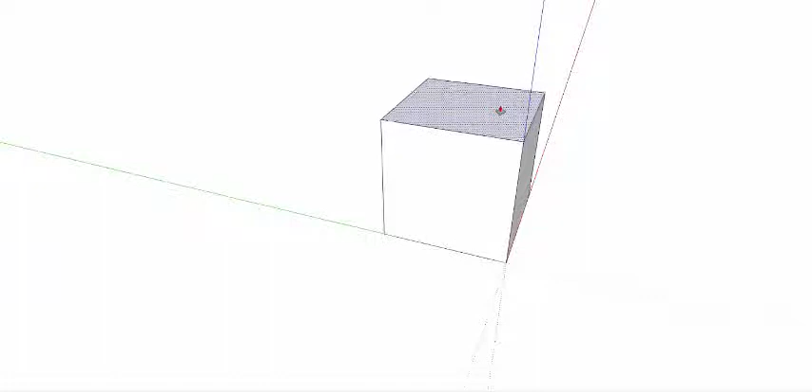Okay, we'll leave that one alone. So what I'll do is take this guy here and make a nice copy of this. Okay, and I'll get rid of this one, I don't leave this here. Then I can make a copy of this and move it over.

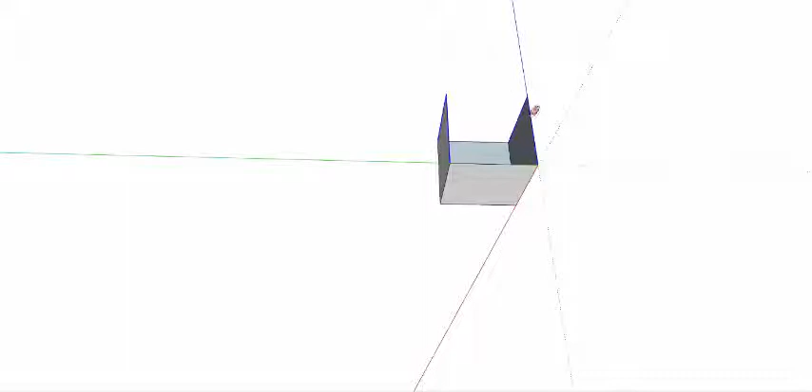Get it far enough out of the way. Okay, and then I'll come back here. And for now, I don't need this, so I could just erase the box. I'll just keep the floor mat. Okay, there we go, I just connect it back up. That's 1,000. Good. And so now I'm just looking straight down this way.

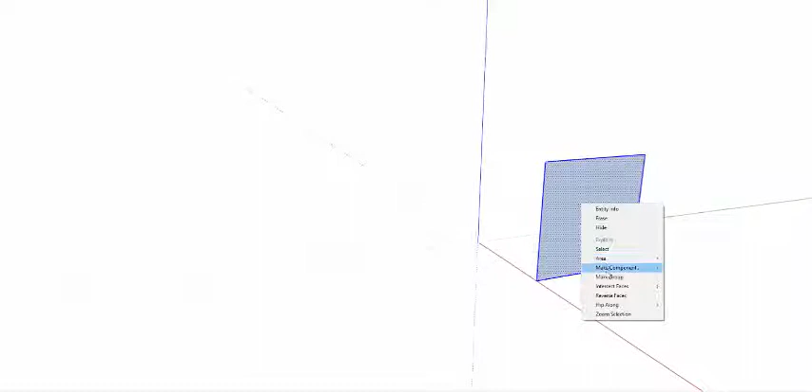So I'm going to put this and center it. I'll make a group out of it, right? And then I'll move it. I can use this to center it as best I can, eyeball it like that, and I'll move it right here.

Okay, now we'll use the golden ratio. So if that's 1, we need to make it go out to 1.618. And the way to do that is we start out with... I don't think I need to, let's explode it.

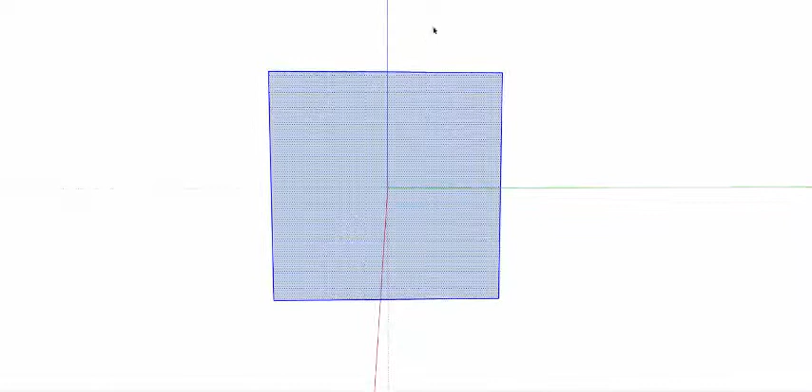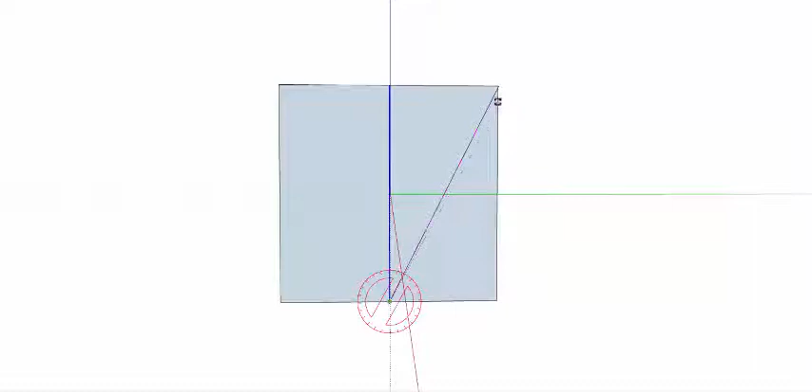Okay, now I'm going to go one line here. Okay, and then one line here, and then rotate it. And now we'll rotate this down the main diagonal, make a copy of it, and rotate it all the way over to here. And that doesn't look good. Let me see, that doesn't look like it's hitting right on the corner, does it?

Okay, so then we go right here. Okay, now I can cycle this over that part there. So I just go like that and make a copy of it. Okay, and there we go.

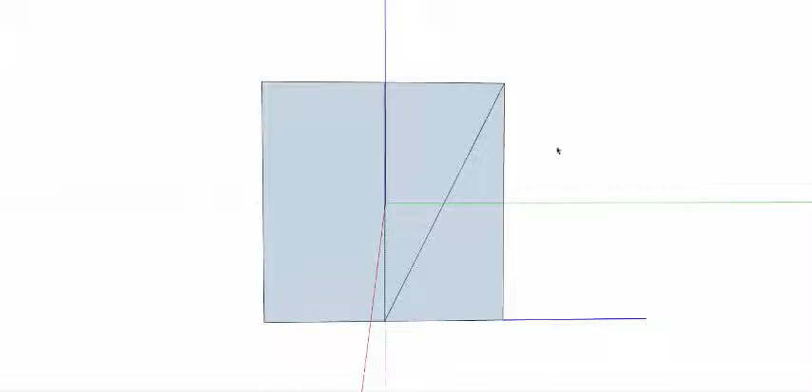Okay, now I take this piece over here, which is this is 1, and that's 0.618, which is the golden triangle. Then I'll just take this guy, yep, and then I'll rotate it 90 degrees.

Like this. There we go, and I don't see it at all. So I'll try it again. And there we go, okay.

Now all we have to do is connect this line across to make us a rectangle where we have 1 and 1.618. So now I'll clean this up.

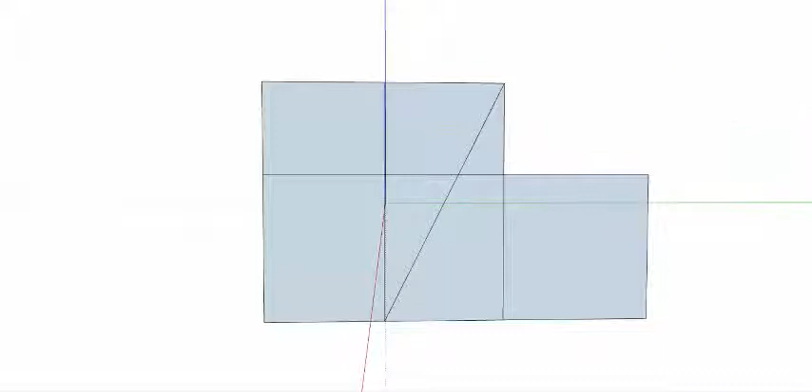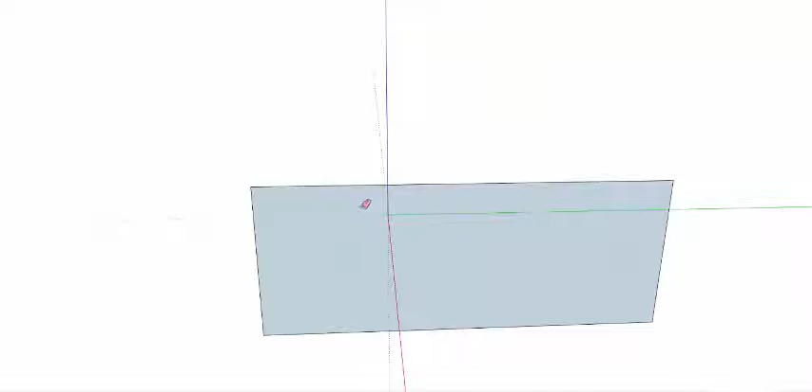I don't need this stuff. Okay. Alright, that's good. I don't really need that either. Okay, so there's a nice golden ratio rectangle.

It should be 1 by 1.618. Okay, we can check it just to make sure, but this is the way of doing it without having to use any of that. That's 0.618, right? And that one is 1.618. Okay, that's the key. So I'll make a group out of this.

Okay, and then what I'll do is move it, center it. So I'm going to center right about there. Yeah, and there we go.

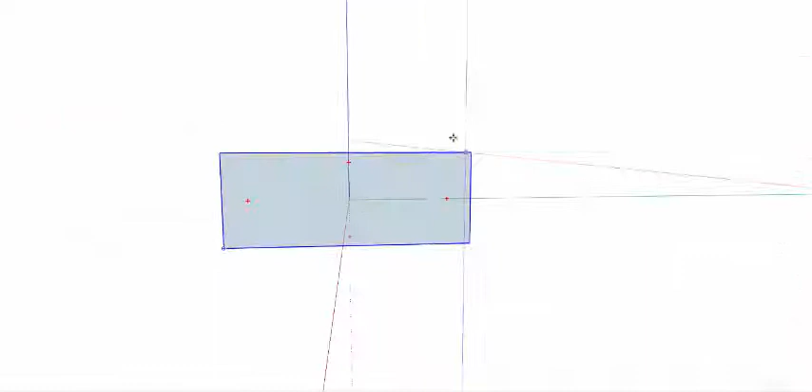Now I'll twirl it. So this is 1. Okay, and I'll go like that, and I'll go like this. Okay, and then I'll twirl that. It's 90 degrees again. There we go.

Alright, and then I'll twirl this one time, right here. So I'll go right in the middle. Okay, and I'll make a copy and they're like this. Okay, and then I'll go up here and twirl it.

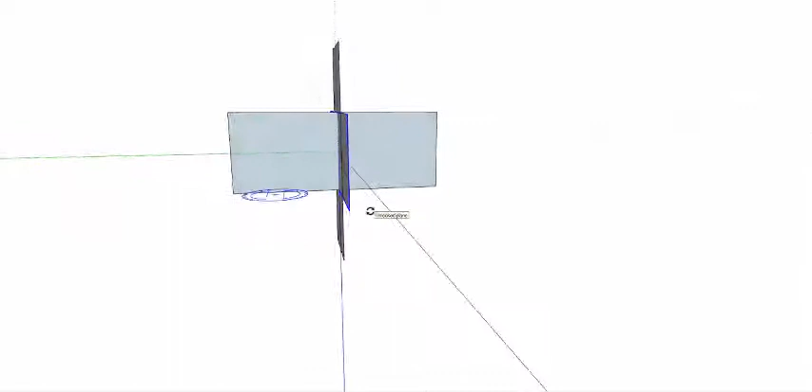That's easy enough, huh? I just need to twirl it right. Yeah, so here we go. There we go, and there we go.

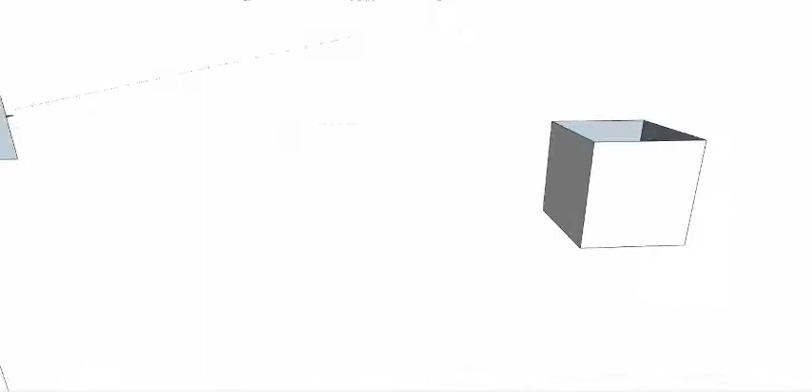Okay, so now all I need to do is bring in my cube. And what I'm going to do with this cube is mark the center point, which is right here, right? And then I'll go to the center point, here to here, okay? And I can do the same thing here.

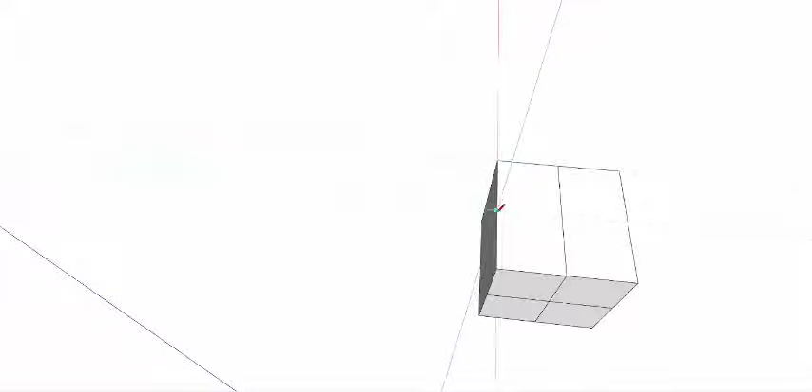Okay, and then there we go, that's nice. And then I'll move one here, here. Okay, and I'll do one inside. It's probably a little bit of overkill, but that's okay. And I'll come over here and I'll get rid of this wall.

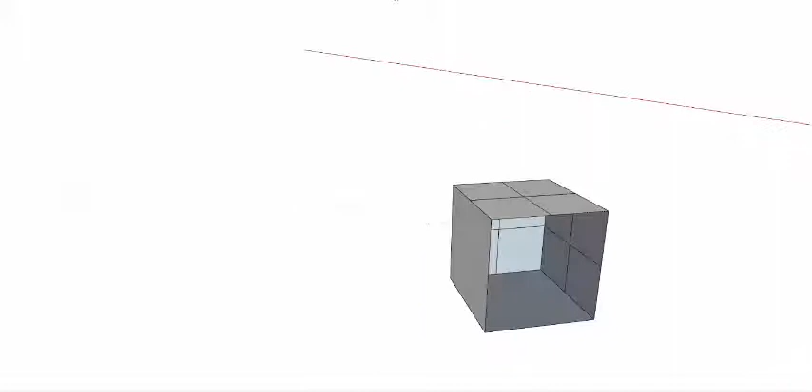Erase, okay. And I'll make a group of this. Now, before I do that, I'm going to have to connect my center point. So that would be, okay. So the center point would be from here down. So I'll go to the center point here, right?

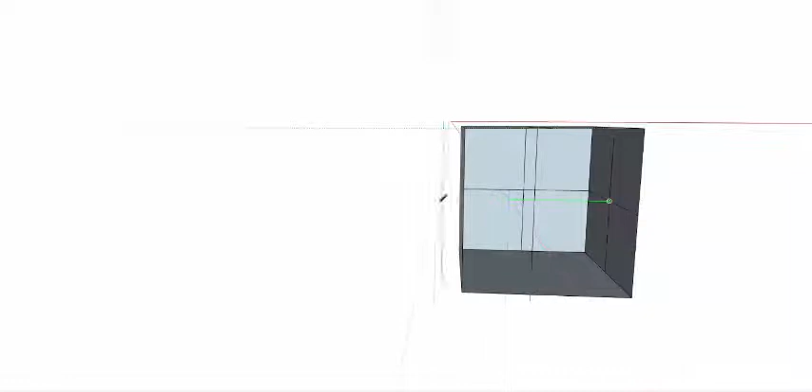And then I would just follow this guy down to the blue axis. Then I go over here and I get this guy. And I come up through here. And there we go. Okay. Now all I gotta do is center it on the other thing.

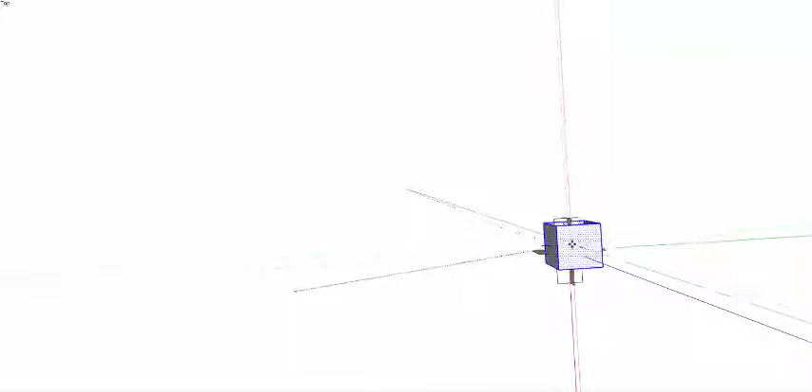So now I'm gonna hide. I'm gonna take this mid, I'll put this as a group. And then I'll put this guy here, right? And start moving along. Over here. Over here. Alright, and we'll get into here.

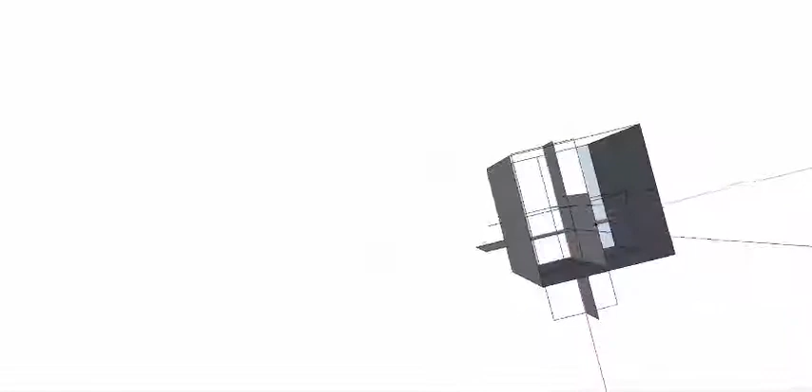And okay, so let's see, what side was open? It's sealed up. Erase, okay. Oh well, that's top one's open. So I have to grab this guy right here. You see where it's at, where they all meet? Right here.

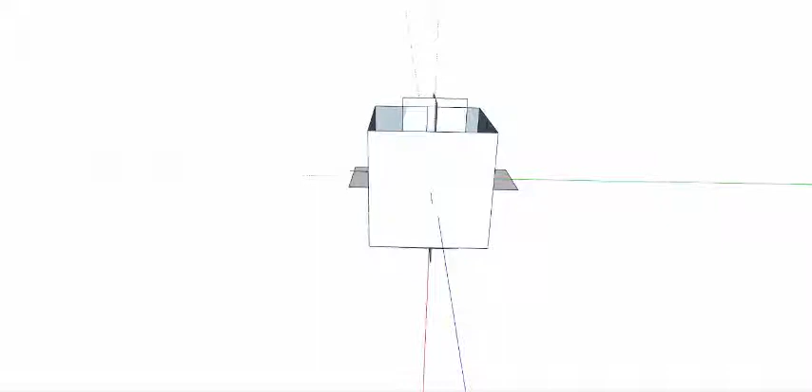And then I'm going to take that and put it down in the center, right? I'll show you. Let me move it a little bit. Oh. Let me go back because I didn't make a group out of it, I guess. I thought I made a group out of it. No. That is weird.

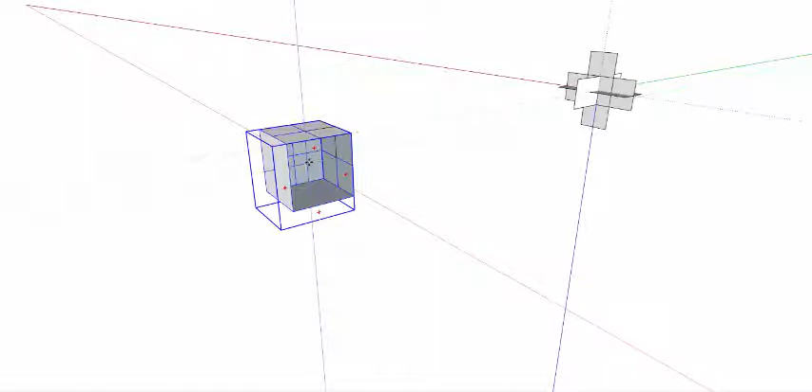Okay, so now I'll make a group. And then I'll grab it here at the intersection. Like right here, right? And then I'll just move it across over here till I can get into right into this point, right? There. See how it's centered? There. Now we're ready to do a pentagon, I think.

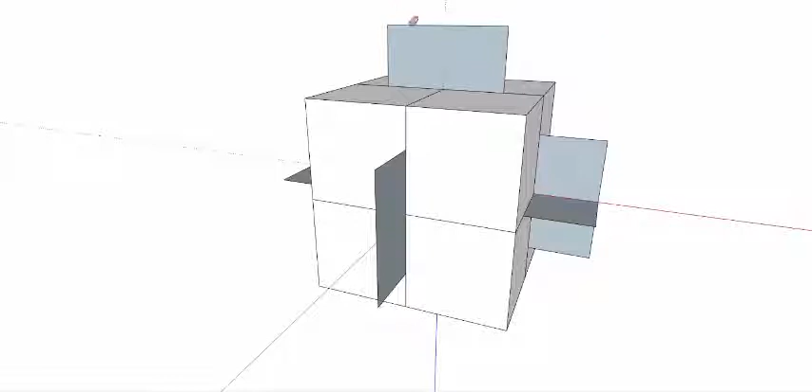And here we go. So now we're going to see if we can make a shape. So I'm going to go from here to here, to here, to here, to here. There we have it. That looks pretty good.

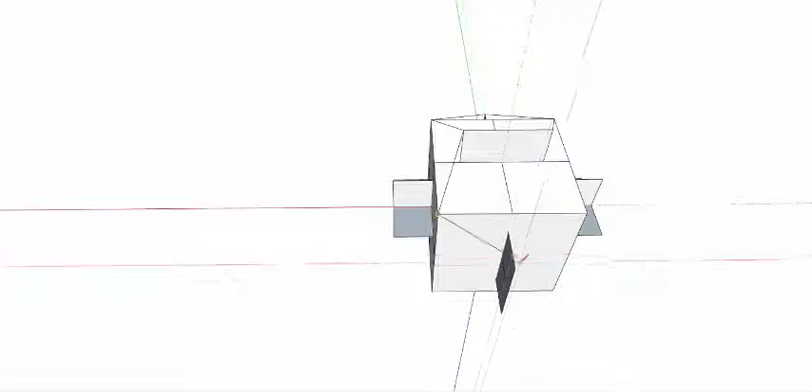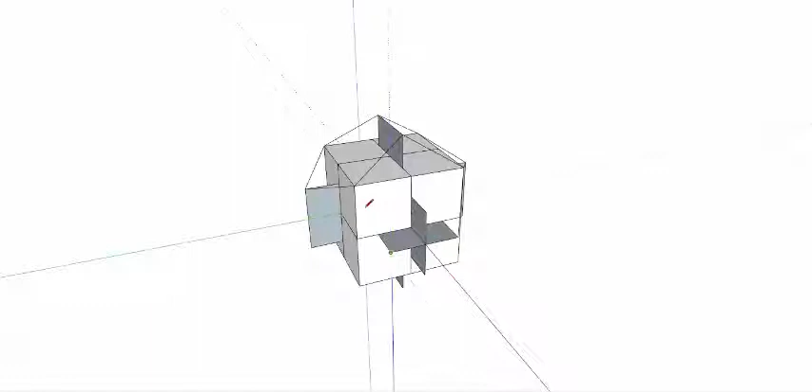So we'll go down to here, right? We'll go up here, we'll go up like this. And we'll do an across of that. Yeah, let's go across. Yeah. Oh, didn't work from here to here for some reason.

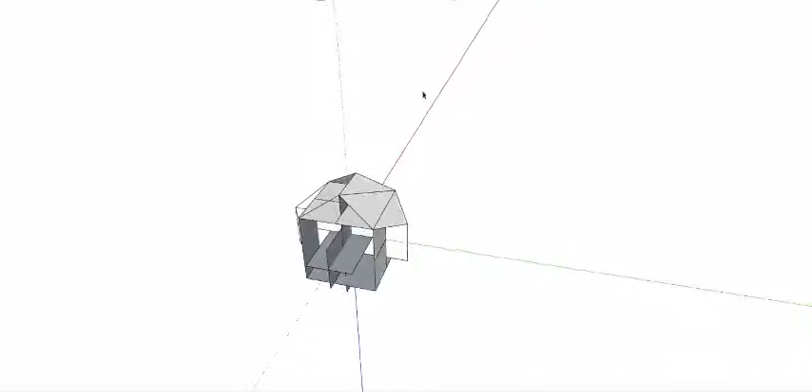Huh. Oh, maybe I needed that point. Yeah, that's why. I don't think I need this diagonal here, do I? Let's get rid of it. Good. Looks like a little house, huh?

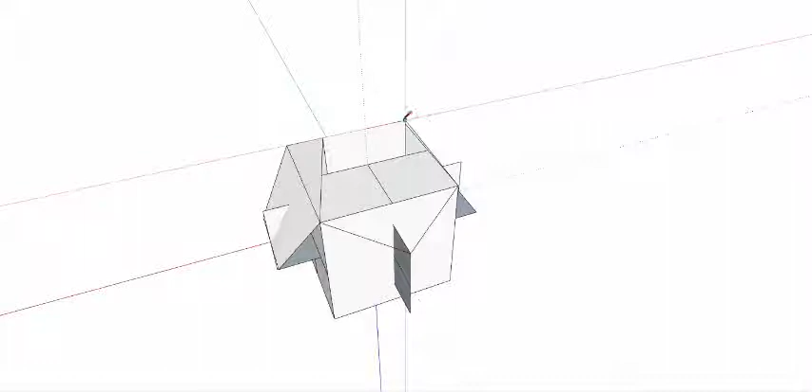Wonder if you could do a dodecahedron house. That'd be pretty cool, I think it could be strong. Let's see. So let me go from here to here, from here to here, here to here. All right. And I can probably get rid of this guy here. All right, now we're going to get our dodecahedron here.

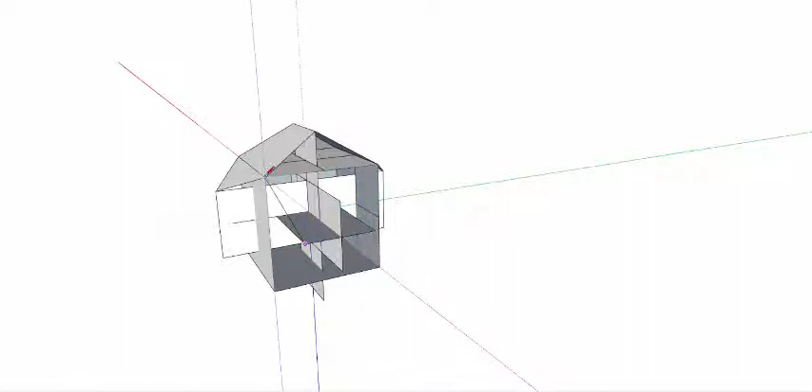All you got to do is go from here to here, from here to here, from here to here, from here to here, and from here to here. There we go. Now we can try this guy from here to here. Good. And go from here to here. Good. And we'll get rid of these two here.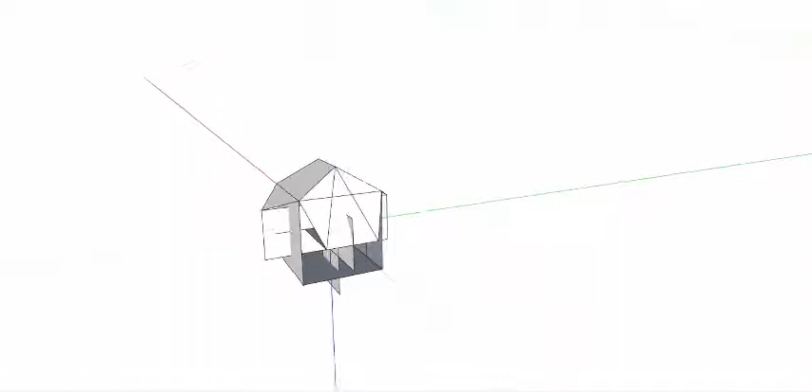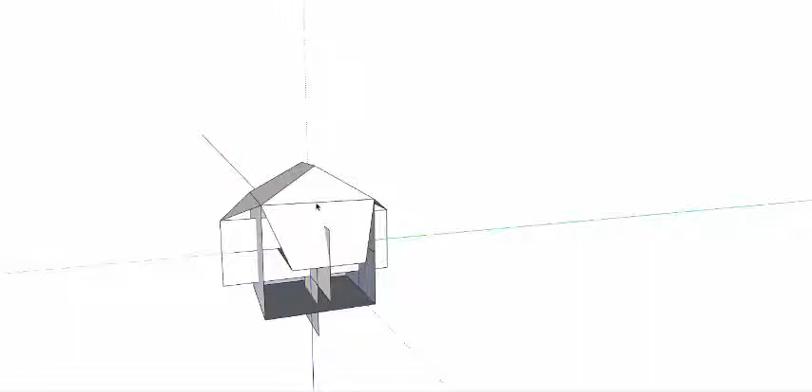No problem. Then what I'll do is just hide it. You can hide your mistakes. Oops, I don't want that. Okay, so I'll hide these. Hide, okay. Go here. Okay, now there we go.

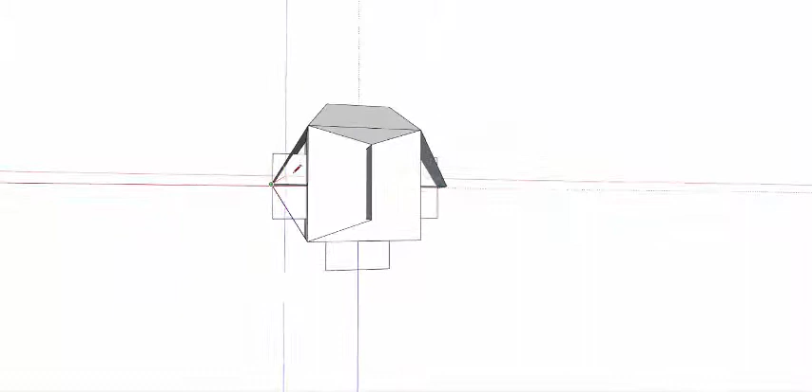Now what I'm going to do is just complete this dodecahedron, but we already have our pentagons. So that's pretty much it. And I'll go from here to here, and then from here to here, and then from here to here, and then we'll go from here to here. Close it up. Okay, and I'll just hide these two so it doesn't look so ugly.

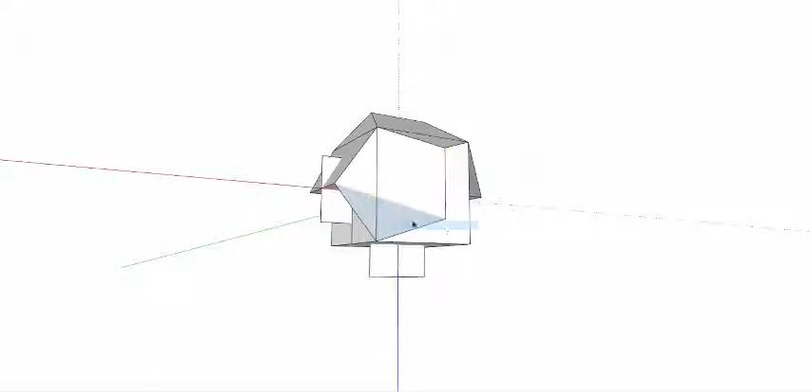Let's see, I can flip that, I think. Reverse face. There we go. Okay, and now you get the idea, right? And so I'll just quickly finish it up because we're almost done anyway.

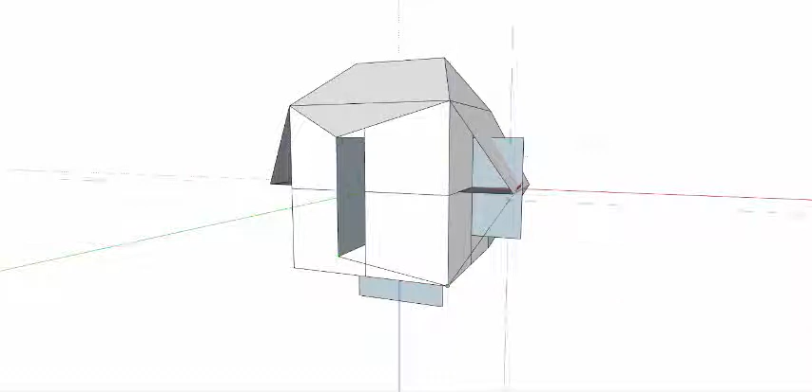So there we go, from here to here. And from here to here. See? And then from here all the way to here. That didn't help, did it? That did. And that did. Okay, and there we have this.

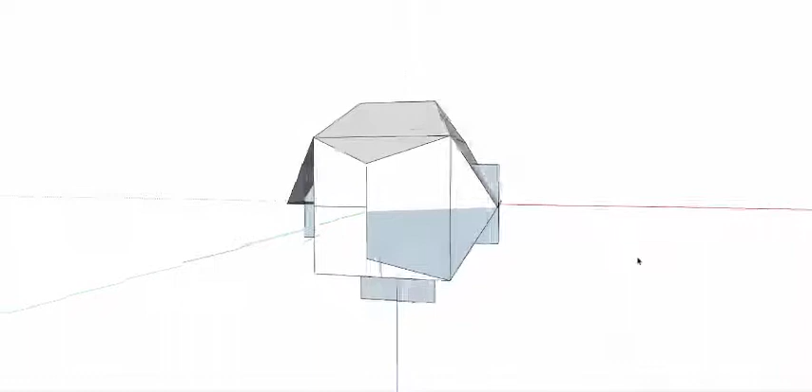Okay. And we're about done, there are 12 of them. So we go from here to here, from here to here, here to here, from here to here, from here to here. There we go. And then we go from here to here. Yep, and from here to here.

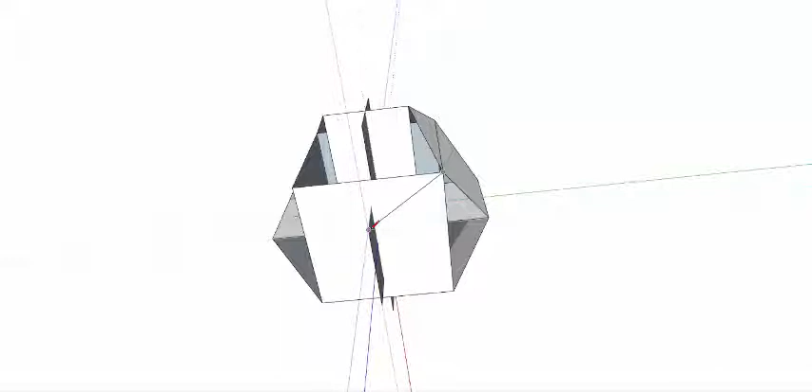Okay, then we go from here to here. We go here to here. And from here to here. Yep, and we'll go over to here. Okay, that's why, I did the wrong spot. It happens a lot.

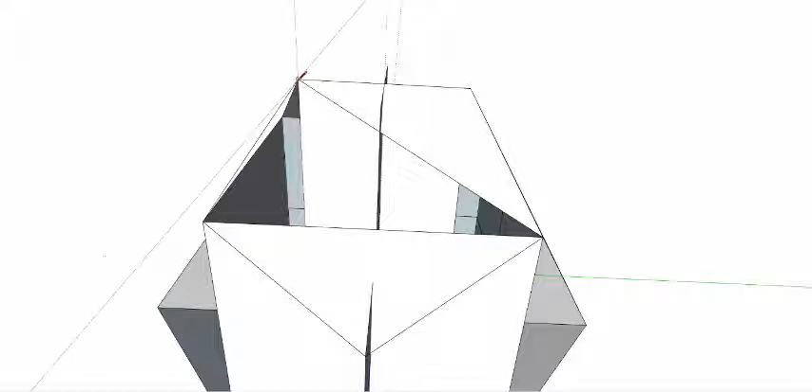Okay. Alright. And we'll erase, or hide. And that's almost done. Here's another one here.

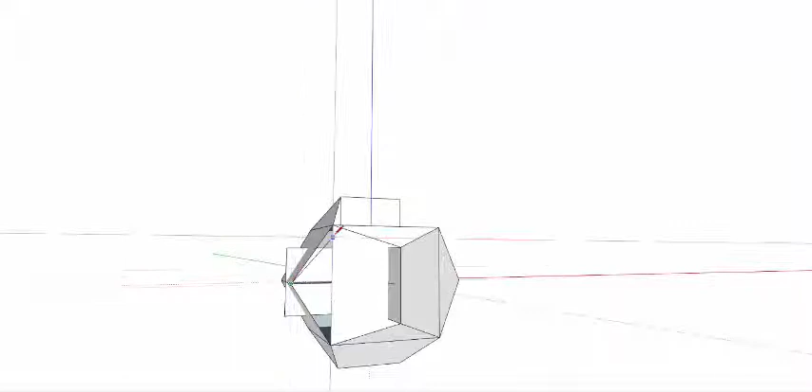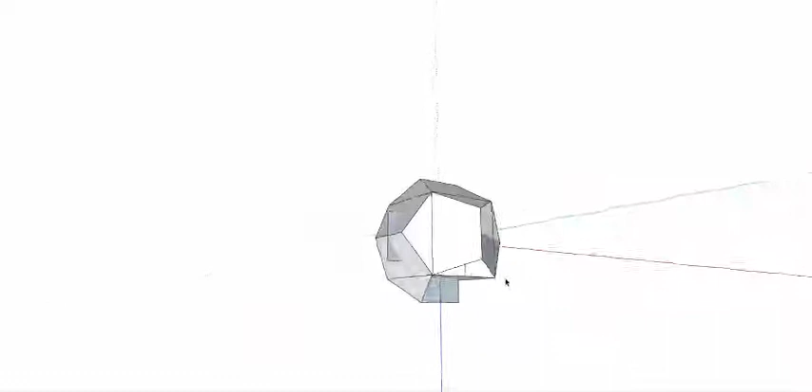Oh, like this one. And there you have it, right? Now we can start cleaning some stuff up here so it looks better.

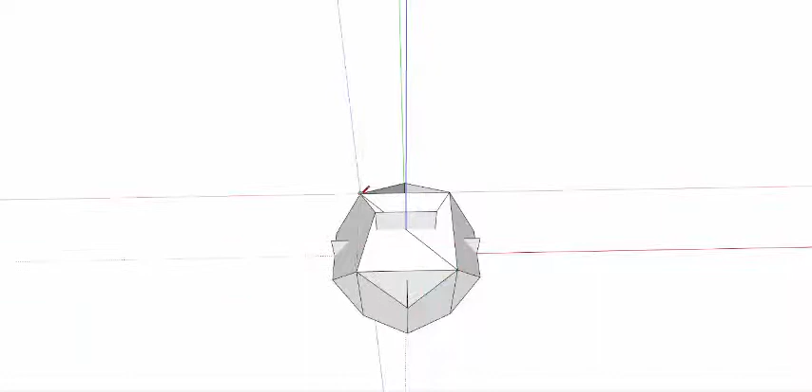First I'll finish this pentagon here. I'll go like this to here, and then up to here, see it? Then down here I can go from here to here, and from here to here, over here, and back again, and then my diagonal. There we go. And then we go from here to here, and from here to here, and then from here to here.

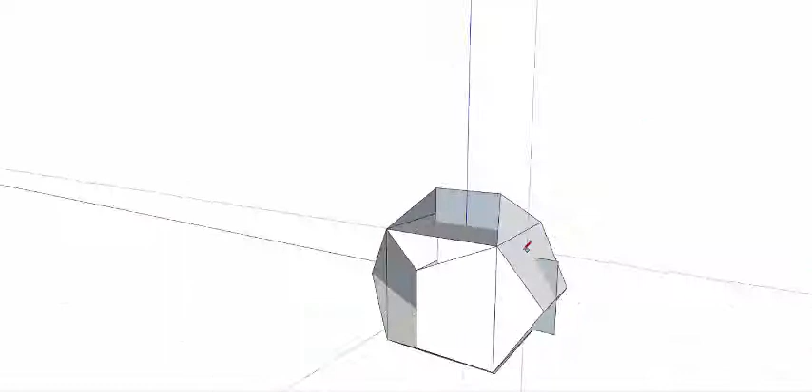Alright, so that's good. We just have these two more things to do. Kind of weird. Go from here to here. There we go. And then let's go from here to here. There you go. Okay, now let's get rid of some of this stuff here, because I don't need it.

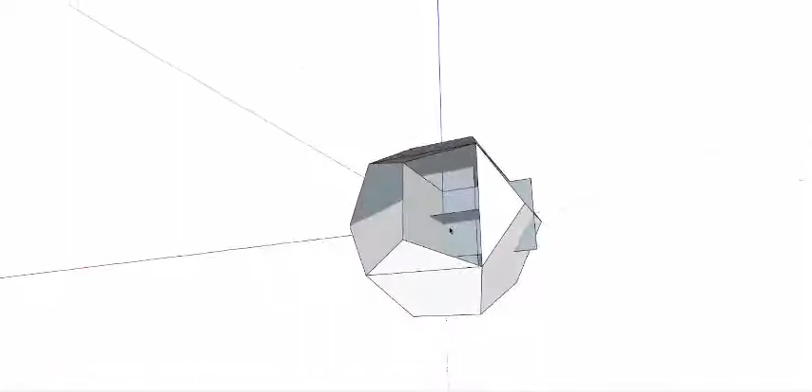I'm going to hide this for a second. Okay, and then what I want to do is get rid of the guts for now. That's one, that's the cube. Okay, and then this is the main verticals.

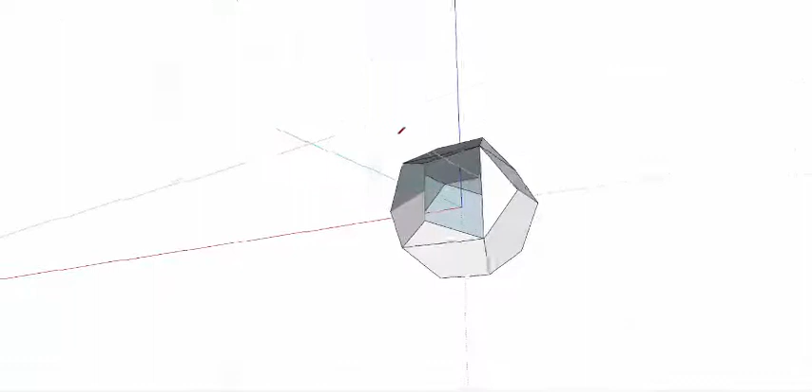And I'll erase that, and then I'll erase this, and I'll erase this. And I think that's it. Yeah, so here we go. Da-da-da-da. And now I can do like this. And I finished my dodecahedron, right?

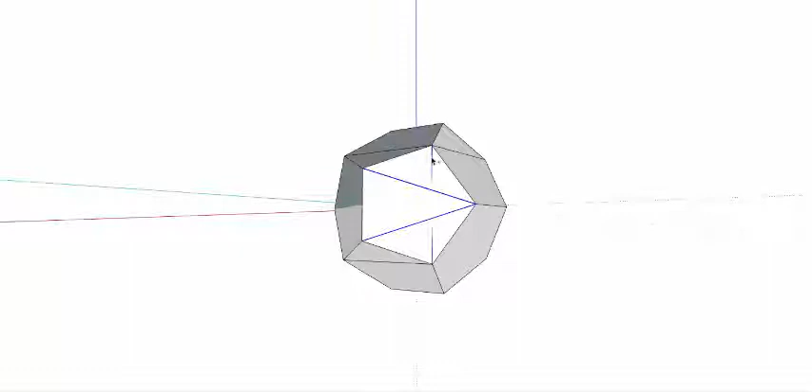We'll just go from here to here and see what happens. And go from here to here and see what happens. Okay, and I'll hide this. Now I can hide all of these. See that? Oops. And I'll hide it all. There we go.

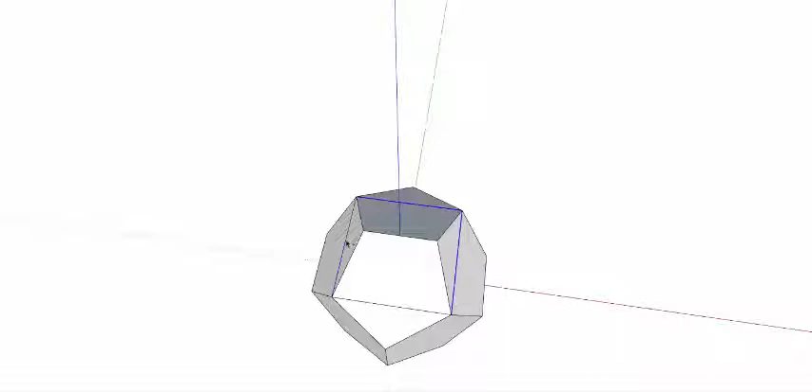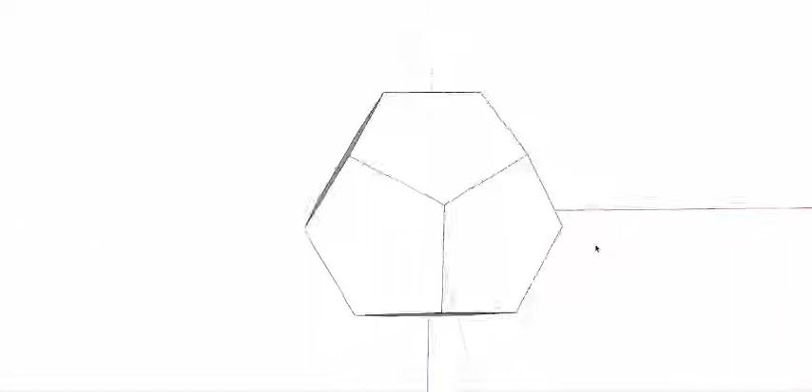And you can reverse face that. And reverse face that. Okay, looks pretty good. And I can take this one, this one, this one, this one. Hide them all. There you go. Okay, that's good. And look at that. It's pretty neat to do here. So any one of these would work great.

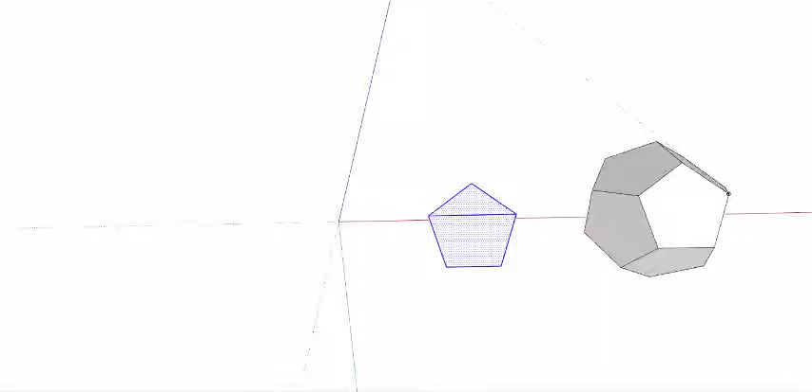Now let's take a pentagon. Let's see how good a job we did. So I'll put that one over here. And then I'll look for this guy here. Okay, and we'll make a copy of that. Okay, and then over here what we'll do is make it a group. Okay, make a group. Alright, now let's take a look, see where we're at with this.

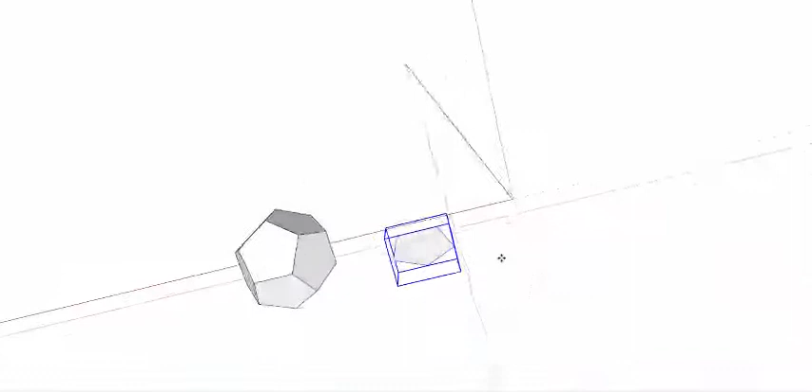Alright, so let's see if I can get in the middle of it. That's right here. Oh, I see. Well, let's just get on this red axis right here. And then I'll move this guy out of the way. Oops. And make a group out of it. Okay, and let's move it out of the way.

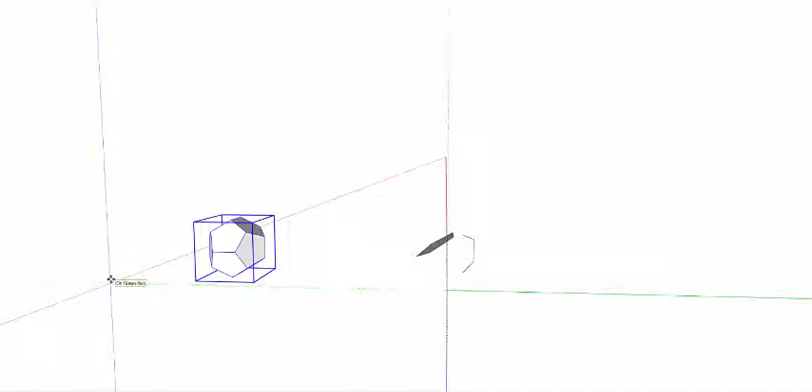Now, let me just get it out of the way for now. Okay, and this, I don't need this thing back here. I don't know where it was. Okay, and then this guy here, let's go back to it. And let's just straighten it out a little bit. So what I'm going to do is turn this one 90 degrees.

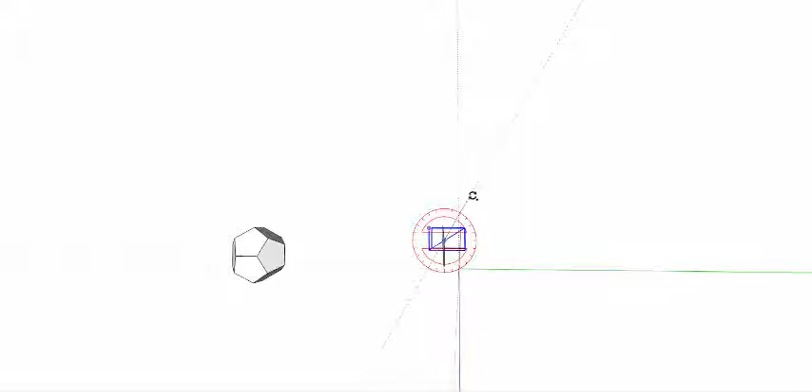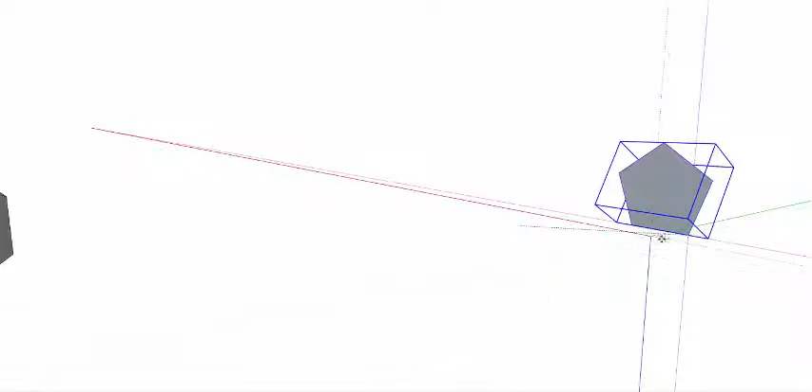Like that. Alright, let's check it out. That looks pretty cool. I don't need that one at all. Okay, then I can take this guy over here and we'll put it right in the corner here. So I'll get this thing and move it over to here. And there it is. That's pretty good, actually.

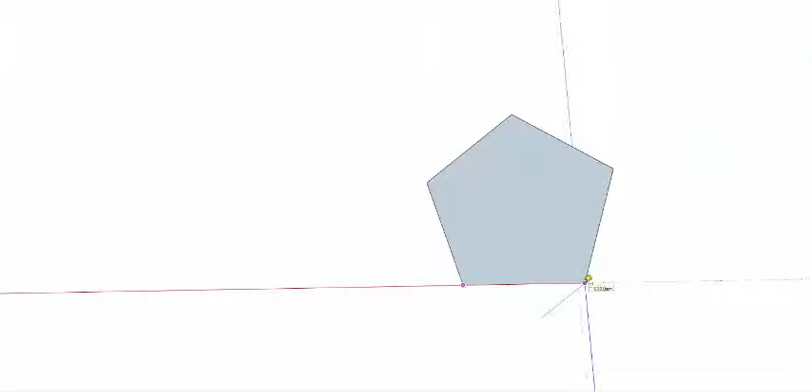Let's see what that measurement looks like, see how good of a kind of a pentagon it is. So I'll put here my measuring tape. So let's see if we got equal sides. So that's 6.18, right? And that's 6.17.7. Pretty good. I mean, for errors, you know, you have a little bit of them.

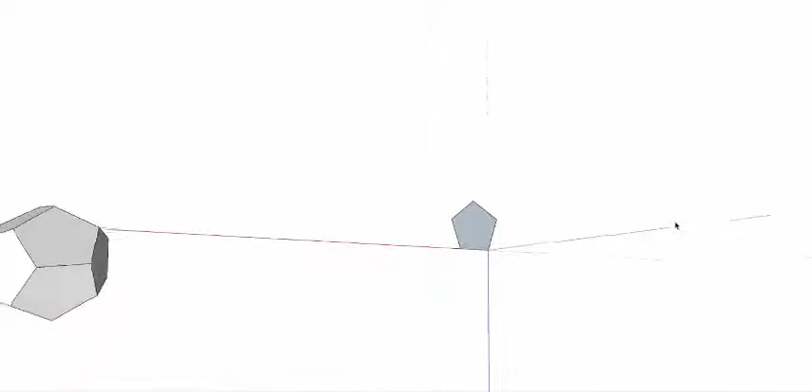So now from this one is 6.18 and 6.18. See that? That's pretty good. That's a pretty good pentagon, I'm going to look at it. It seems like it's straight up, or no, let's see. Yeah, it might be slightly forward.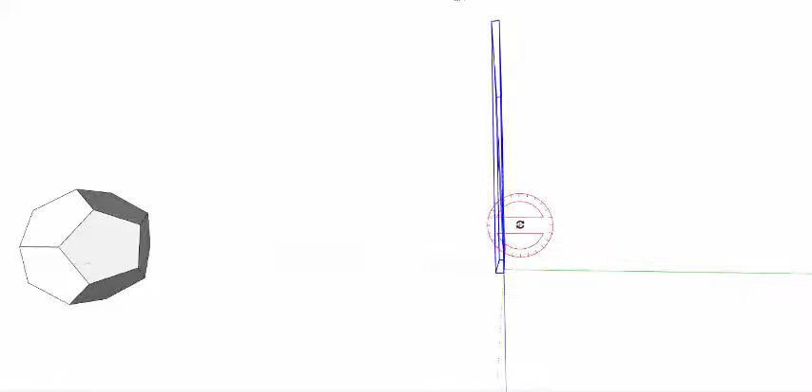Let's see if we can clean that up a little bit. So now I'll go like this. You know what, I'll take this guy and I'll explode. Then I'll regroup and it'll be referenced like I want it. So now I'm going to go here. Let me close in and go into this point right here. I need to be on the red axis. There we go. And then I need this guy to go this way.

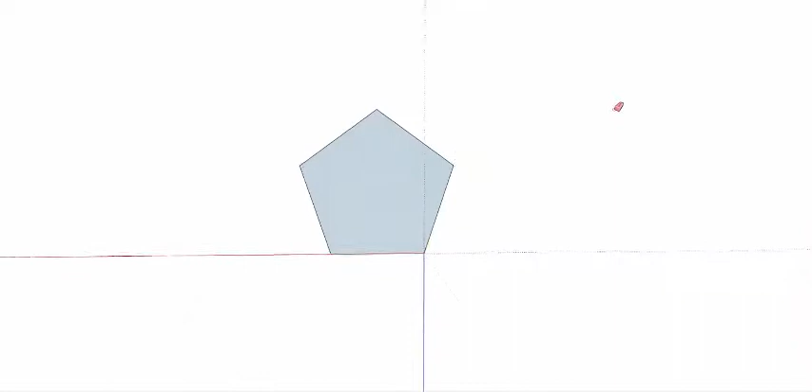No, I didn't need this. There, let me get rid of this guy. I made a copy, but I really didn't need a copy. Alright, that should be, yeah, that looks good. Isn't that neat?